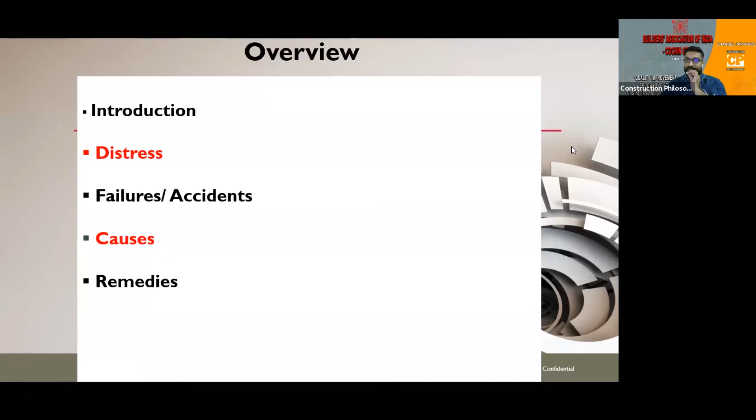Anyway, so the overview of my talk today is: introduction to the topic, and we briefly talk about what is distress, and failures and accidents that happen because of excessive distress, the causes of these distresses in buildings, and remedies we will talk about. So this is the brief overview of my talk.

So normally any building which is in distress tries to de-stress itself, meaning it will collapse. That is the thing. And we all know why there is distress in a building.

Any building that is designed as per the intent, as per the design basis, will not have distress. We consider the loads as per the standards. We consider the planning as per the intent of the user and end user requirements. And we design the structure as per well laid out structural principles, by analyzing for the stresses and loads and designing for the stresses. That is how buildings remain healthy, with the serviceability criteria being met and the limit state of collapse being met.

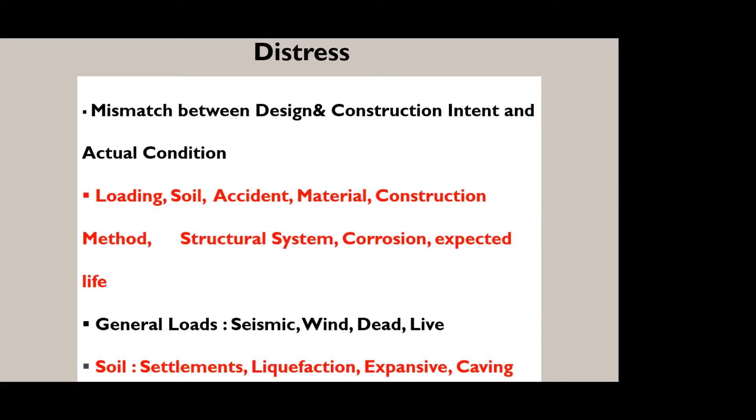And next is the soil. In the soil, the settlements are calculated based on theoretical things and testing that we do. But in real conditions, it is very difficult to predict accurate settlements because of soil structure interaction differences, and the soil itself is such a complex medium that prediction of settlements is not alone possible by the soil sample collected at the location or the plate load test. It's a wide spectrum, and there are still a lot of gray areas in soil. Anil is a better person to comment on this, but definitely it is the biggest challenge for engineers and buildings.

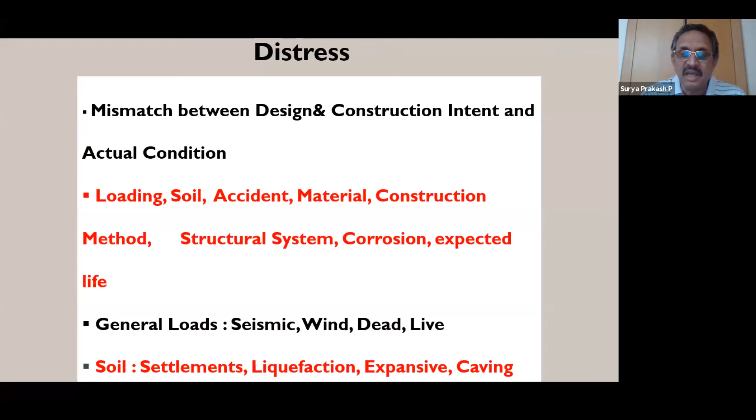Liquefaction is another biggest phenomenon during earthquakes, particularly for silty sandy soils. When we design structures, we have to consider this phenomenon and provide for ground improvement. Expansive clays and caving in of soils because of the formation of strata and different strata - these are all various factors that can cause distress in buildings.

Accidents include fire, blast, impact, and flood - these are the various accidents that can happen. We have to keep in mind, particularly for accidents, we may not be able to design for serviceability criteria, but at least we have to design for robustness, that means to prevent collapse of the structure.

Next is the material - poor quality of material due to improper quality standards, wrong specification, and the shelf life, that is usage of the material. I have come across many projects where the concrete used in structural elements has already set, initial setting is done. So when we do the testing, we realize the cube strength will be all right, but the actual concrete used in structural elements will not be according to design specifications. That is where shelf life comes into picture, particularly for cement, concrete, and various chemicals we might be using in construction.

Next is the structural system - it is an engineering error actually in analysis, modeling, support modeling, and element modeling. I also come across a lot of people misinterpreting structural systems, and the load transfer mechanism also depends largely on the structural system. And the corrosion and life of structure, which we'll deal with via examples.

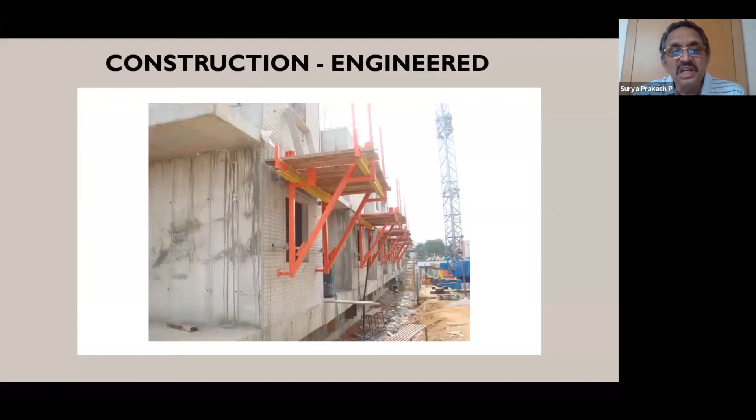All this will cause a lot of distress in buildings actually. And unplanned openings in the wall or structure, conduits, and all this will cause stresses which are not considered in the design.

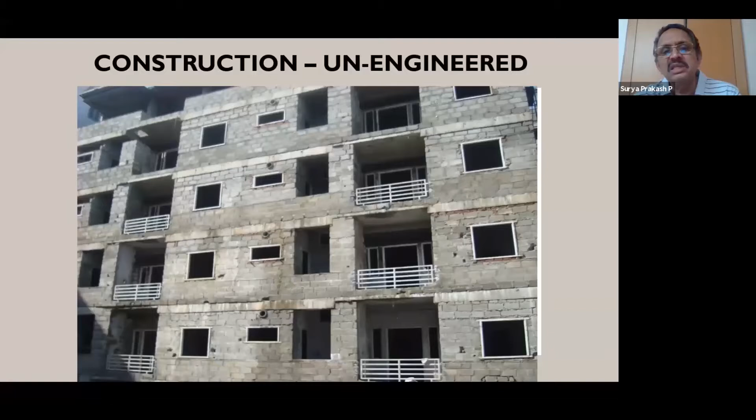In a typical construction site, we see differences between the detailing as per drawing and actual construction - whether it's the reinforcement, the cover, the alignment of the column, or alignment of the beams. All these factors contribute to distress if they are not properly done following the relevant codal provisions, standards, or practice.

We feel concrete is a homogeneous and hard material, but you can see what happens if it is not compacted or vibrated properly. Whatever grade - M20, M25, M30 - we design the mix and make the concrete as per design, but if it's not executed properly, the cube strength will show very good results while the actual site condition is like this. If we're not given the opportunity to inspect before they render the top, we don't even know the concrete isn't compacted properly, and it will be subjected to stress and distress that is undesigned.

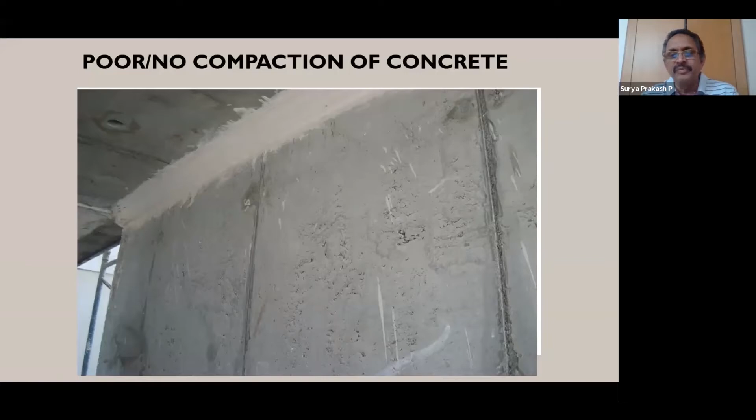So we have made it a point, particularly for concrete, to have core tests done at random, to ensure that the concrete that is designed and the concrete that is executed are of the same grade. This is one of the biggest points.

Next is construction joints. This is a typical photograph I got from some sites. Can you say you see any construction joint engineered here? This is actually the biggest problem - if these construction joints are not treated or made properly, it will cause a lot of problems in the performance and serviceability of the structure.

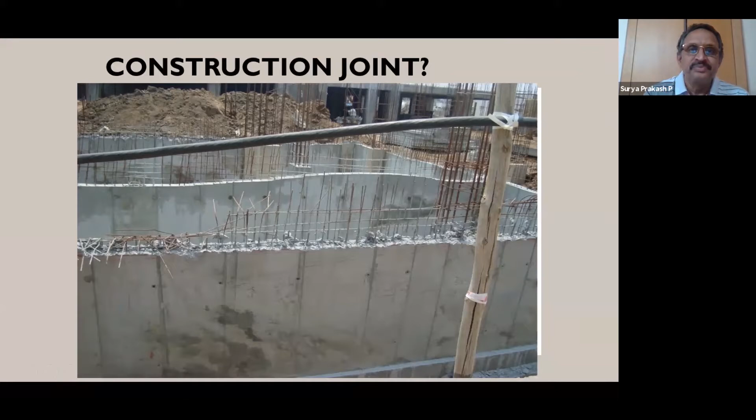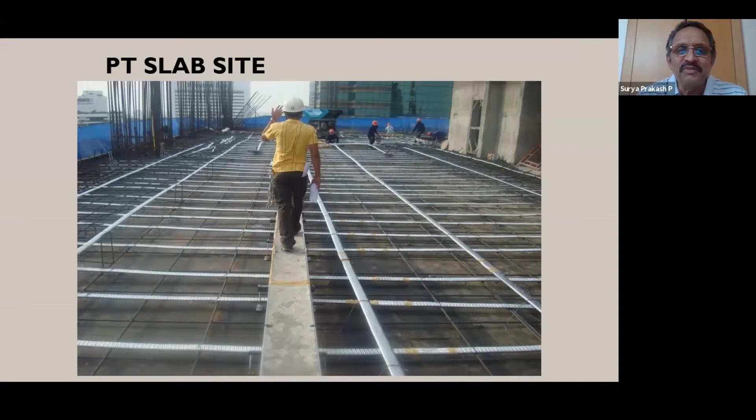The next biggest thing happening in our country now is the PT slab. I've probably been using these post-tensioned slabs for the last 20 years in buildings. But with post-tensioning, with more technology we are inviting more challenges and causing more distress in the building. So I'll be sharing some examples of challenges we have in PT, post-tensioned slabs.

Next is waterproofing. This is the biggest issue in buildings, particularly residential or even office buildings, where we have toilets. If they are not treated properly for water barriers, and the detailing of this water barrier in conjunction with sewer lines and plumbing lines, it becomes a huge challenge. This can cause deterioration of the designed concrete quality and performance of the structure over time, leading to higher distress. It starts with dampness, then slowly corrosion, then distress in the structure. This waterproofing and water barrier is a very important element which I'll be sharing.

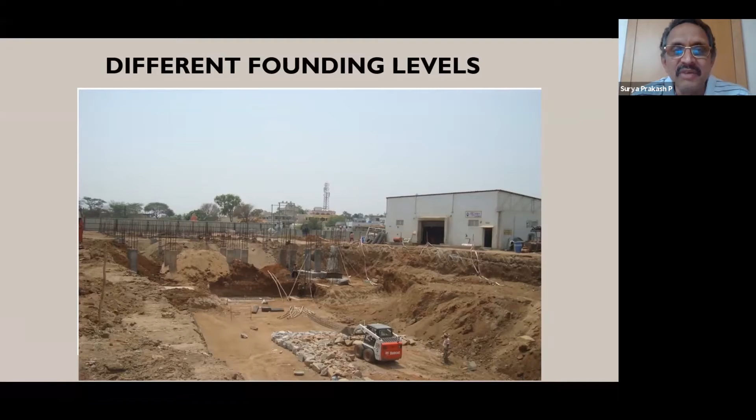Next, in soils, you can see the difference in founding levels, which mostly happens for lift pits that have to be deeper than the basement level. There are different founding levels due to soil conditions at the site, but we have to consider the minimum clear distance between footings and the difference in level, which has to be 3D to 5D depending on the type of soil. This is a very important aspect during construction - construction teams take a decision to change the level considering the soil, but it has to be brought to the notice of the concerned design engineer and probably a geotechnical expert to decide how it has to be treated when there are different founding levels.

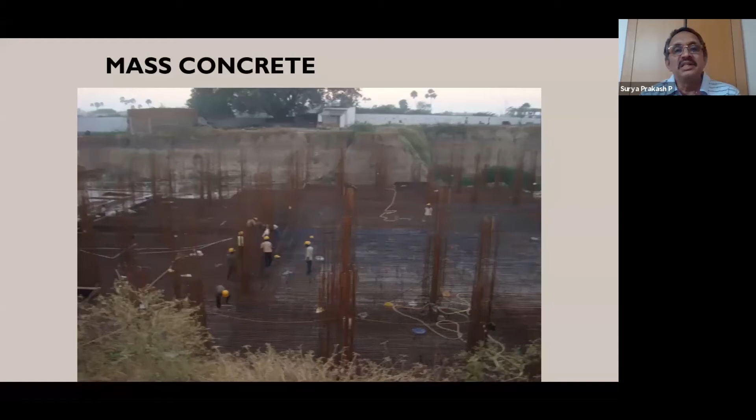Next is mass concrete. This also causes a lot of issues, particularly in rafts, when you do mass concreting without designing for the heat of hydration. The initial concrete itself can have internal cracks, which can also lead to additional stresses and distress in the foundation itself.

Excavation, deep excavation, which is very common nowadays, without considering the adjoining structures, can also lead to catastrophe or distress in the buildings. So instead of going for retrofit or rehabilitation or repair kind of stuff, it is better to have proper methodology, proper approach to handling these deep excavations by shoring and strutting, by active anchors or passive anchors kind of systems, or touch piles or shoring piles or sheet piles. So this is very important.

We have to plan before itself, considering the excavations and adjoining structures, and we have to draft the design basis considering the type of soil and the depth of excavation and adjoining structures. So this is the important aspect. So I'm just covering various aspects of this distress.

Collapse during construction, which is again quite common, which happens in most of the buildings because of lack of construction engineering. So one has to plan the shuttering and centering and support system for any concreting works, considering the loads during construction and the stages of construction. We have come across many through news, many during construction, and loss of life is a very pathetic thing that happens.

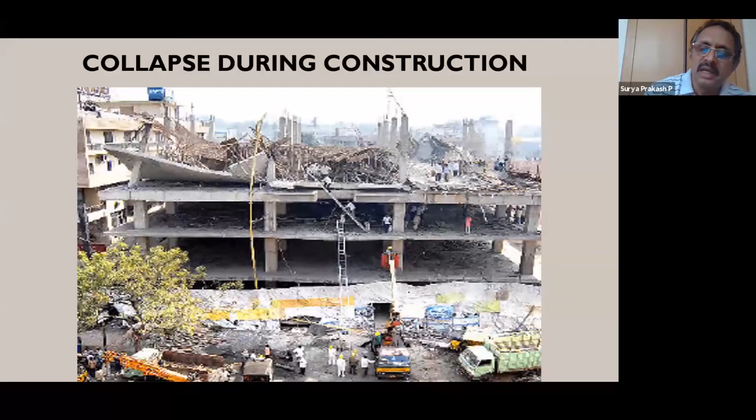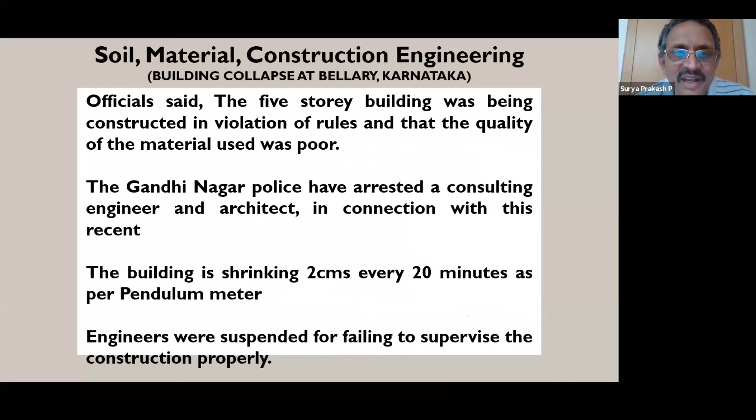Now let us look at some of the case studies that I have come across, just to stress on the importance of proper engineering, proper quality control, and proper management of the built environment. So no soil test, no material test, no construction engineering. I'll not read all this stuff, but with photographs - this is an accident that happened in Hyderabad, again during construction itself, but it was a progressive collapse.

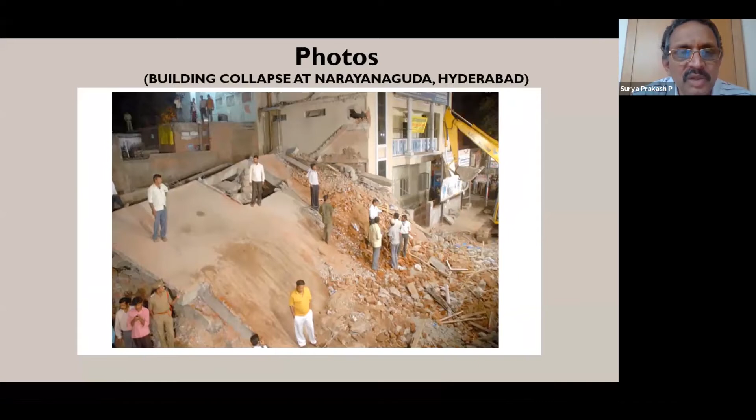One slab collapsed and subsequently 2-3 slabs, and people died - 2-3 people died during construction of such a small building itself. Many people got trapped and then had to be removed. This is another accident in Karnataka, Bellary. Here also you can see during construction itself, due to bad material, bad engineering, or no engineering, the building has collapsed. A thorough investigation was done, and the people responsible were taken to task.

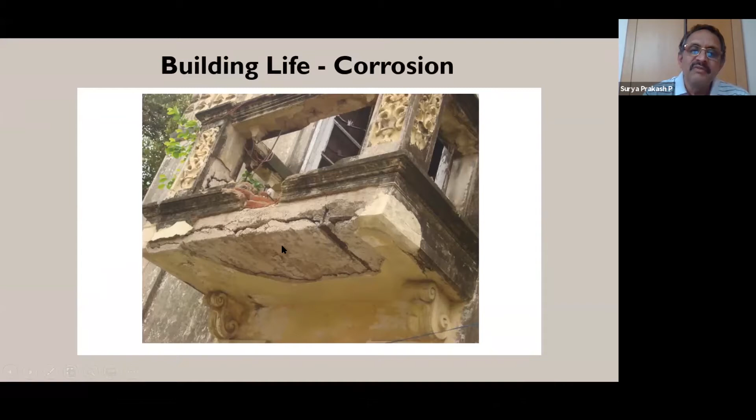Next is the dilapidated heritage old buildings. This is probably a more than 100 year old building in Hyderabad. This is the condition of the building, and if this has to be saved, it is a very real challenge for the engineers restoring this kind of buildings, where this was lime concrete, and lime concrete has to be restored.

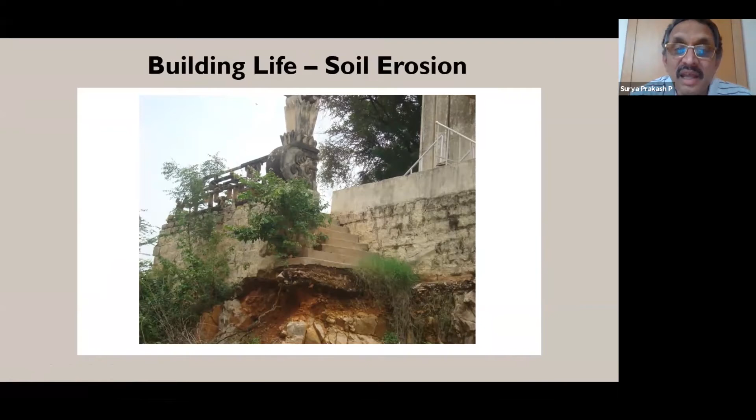You can see a lot of vegetation and erosion in the soil underneath the structure itself, and the ground levels varying. So all this has to be considered while assessing the life of the structure, or certifying for further life of the structure, residual life of the structure. Here also you can see below the foundation, the soil has got extensive roots and trees grown, and it will also cause distress in the building.

This is the weathering aspect of even the jack arch roofs. It has served a very good life already, more than 100 years, but still we have to consider - if we have to extend the life of this kind of structure, thorough investigation and proper method of restoration have to be adopted.

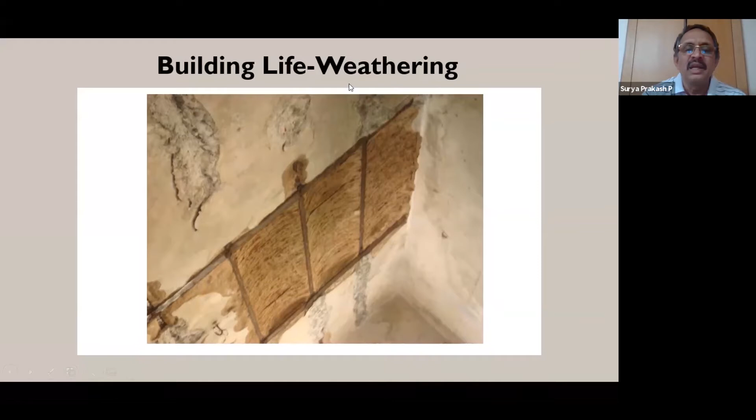Next is the earthquake. As introduced, I had the opportunity to visit Gujarat, Ahmedabad post-earthquake. Very unfortunate, but a big eye-opener. In fact, this is when I thought there was a strong need for engineering reforms. I was part of a committee constituted by the government of Gujarat then, and I had the opportunity to work with Professor A.S. Arya.

In our report, one thing is we have prepared the guidelines for damage assessment of the structures post-earthquake, and which kind of structure can be restored and which kind of structure has to be dismantled. We have prepared the guidelines, which has become part of the code, I was told later. But we have also given the recommendation to the government to value the presence of good engineering practices.

This is very, very important, because most of the structures that were in Gujarat were not designed for earthquake itself - that is the saddest part of it. So they will be subjected to distress because of the earthquake for which they are not designed. And then periodic training of all categories of engineers - what are the categories of engineers?

We suggested that a geotechnical engineer has to be on board of every project, along with a structural engineer and a civil supervising engineer. These three categories are minimum for larger projects, larger spans, or tall buildings; there should also be a peer reviewing engineer. So there are 4 categories that we have suggested, along with minimum fee structures for professional engineers.

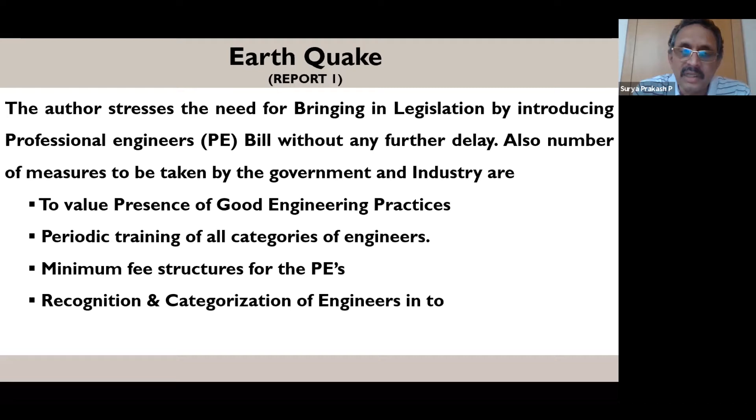This is one of the biggest challenges our industry is facing, because if engineers are not paid well, there's a saying: if you pay peanuts, you get monkeys. The same thing is happening in civil engineering and structural engineering. So we have to have recognition and categorization of engineers.

This I have drafted in 2001. I'm just sharing the same report. It is still a dream to be realized for me, for all of us engineers, so we all have to work for it.

So geotechnical engineers, structural engineers, construction or supervising engineers, and proof consultants or peer review consultants - these are all 4 categories which have to be part of the design team or project team, who should be professional engineers. They should have accountability, responsibility, and should also be recognized by the government in these categories. This is what we are all fighting for all over India now.

So the first cause of damage is lack of good engineering practices, resulting in poor quality of materials, bad workmanship, and lack of good construction practices.

The second cause is ill-formed structural systems, such as irregular grids, stub columns or floating columns, large cantilevers, and unsymmetrical and non-uniform patterns. Now you can see the latest code 16700 and IS 1893 recommendations about symmetry have evolved from these observations during the post-Gujarat earthquake.

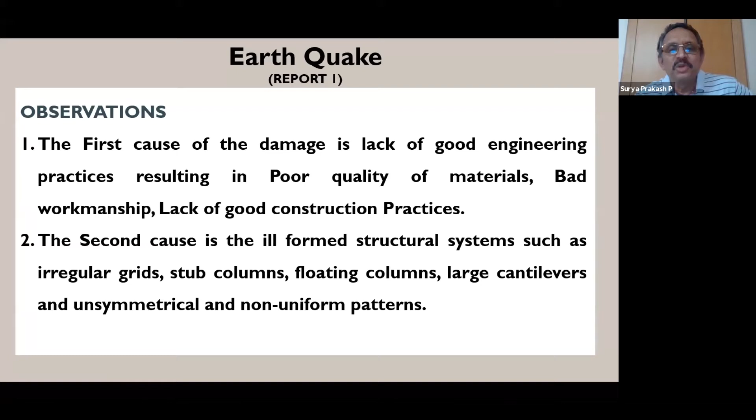Next is the lack of proper design approach. Many buildings are not even designed for earthquake, as I said. The ductility provisions to be followed in earthquake-prone areas are not followed, and even the standards are not complied with in the detailing or provision of reinforcement. So everything is missing.

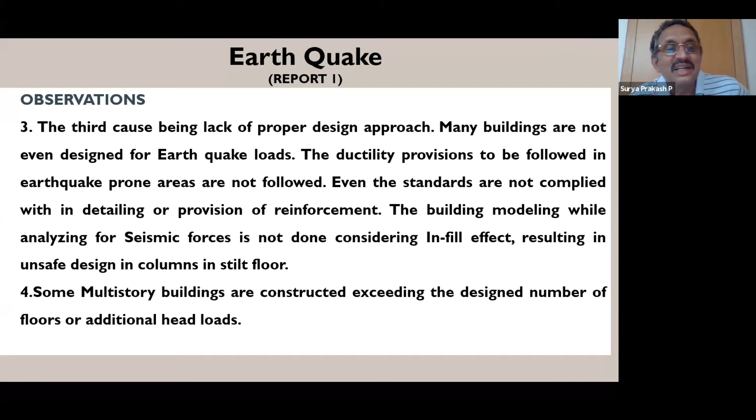Multi-story buildings are constructed exceeding the design number of floors, or with additional dead loads like water tanks. Buildings with good framing patterns, with columns at regular intervals - every engineered building has performed well. 90% of the engineered buildings have survived the earthquake without much damage. So the basic requirement is engineering.

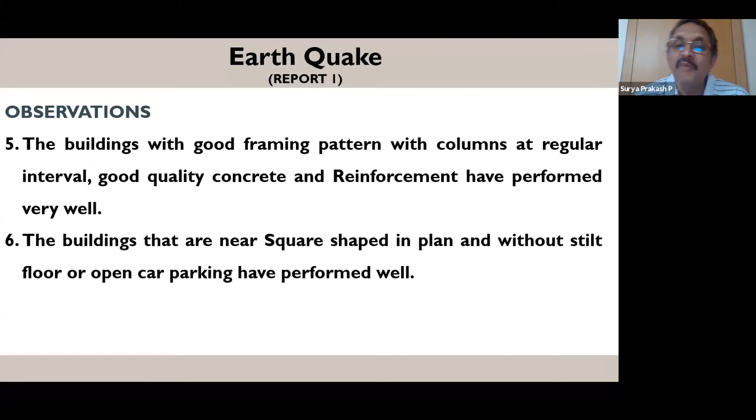The buildings that are near-square shaped in plan, without stilt floor or open parking, have performed very well. These are all the observations.

So, enforce the professional engineers bill. This was our recommendation in 2001: 4 categories of engineers, occupancy certificates, and periodic certification. Please remember, all buildings have to be qualified for seismic loads every 5 years. This is another recommendation we made, and it is part of the National Building Code also.

So we all have to insist that when we certify structural stability for a building, we qualify it saying this certificate is valid for 5 years and has to be renewed every 5 years. This is because codes are changing, and with every revision in the code, the building we have certified has to be retrofitted. So we all have to work for it.

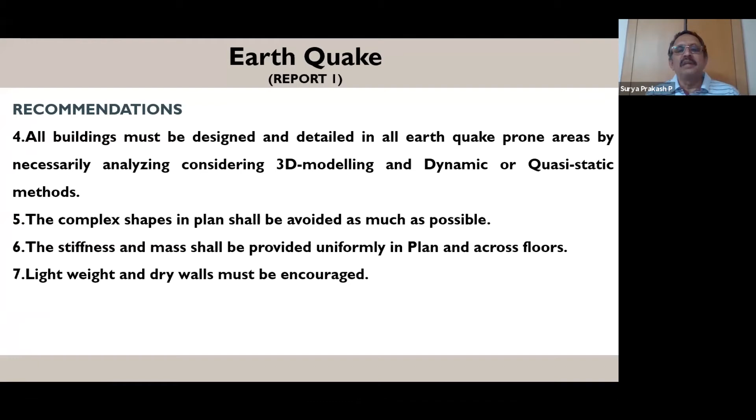Next, all buildings must be designed and detailed per 13920 in earthquake-prone areas, necessarily analyzing and considering 3D modeling and dynamic or quasi-static methods. Complex shapes in plan shall be avoided as much as possible, considering stiffness and mass. So these are all the recommendations.

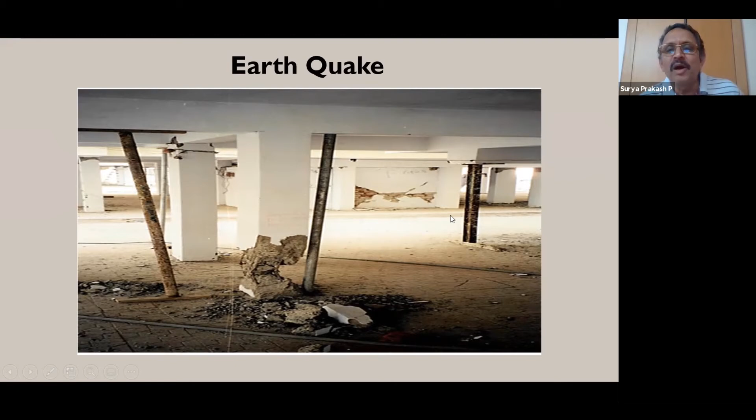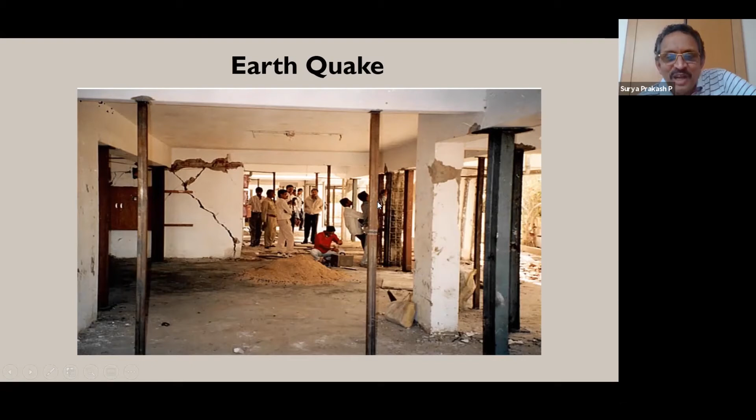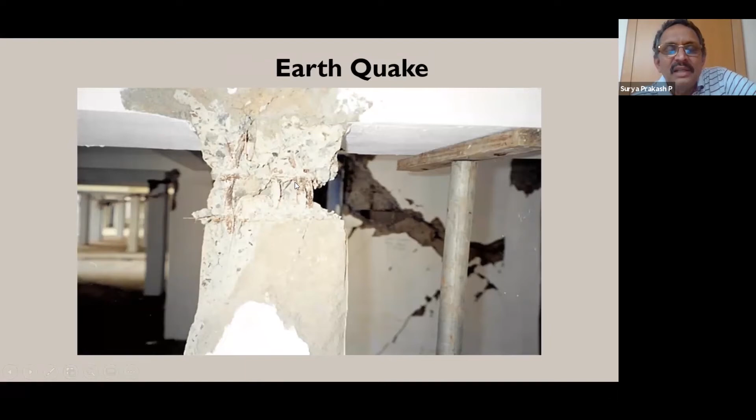So these are the distressed buildings I call. You can see here also most of the damages are near the beams, floor beams, and above the floor. So the maximum shear occurs here, that's why we have ductile detailing at the junction of the beam and columns. Here also is another case of a column where it has cracked. So these are all the distressed elements.

Next is wind. For earthquake we have seen some examples, and for wind, these are some of the towers which I have inspected post-collapse. Maybe I would have done 50, 60 collapse forensic audits for the failures.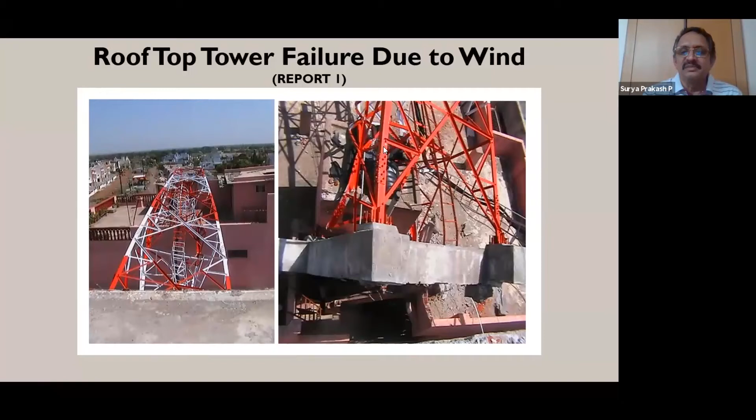Here you can see the foundation concrete has flown with the tower. This kind of distress is because of lack of proper anchorage. So when we talk about wind, the shear and the anchorage are very important, and the tension for which we have to design. These are the foundation pedestals without proper anchorage to the base structure. And this is another mast which has collapsed.

So many examples. Here you can see the net area calculation, which is very important in case of tension members. We have the formula for net area in which we have to consider the number of bolts. But here you can see, during construction, they have put more bolt holes in the same cross section, because of which the whole structure has failed. So it's very important detailing in steel structures, particularly for wind conditions.

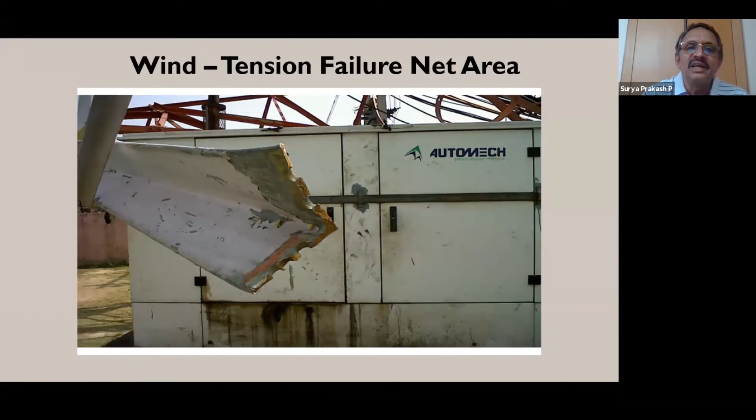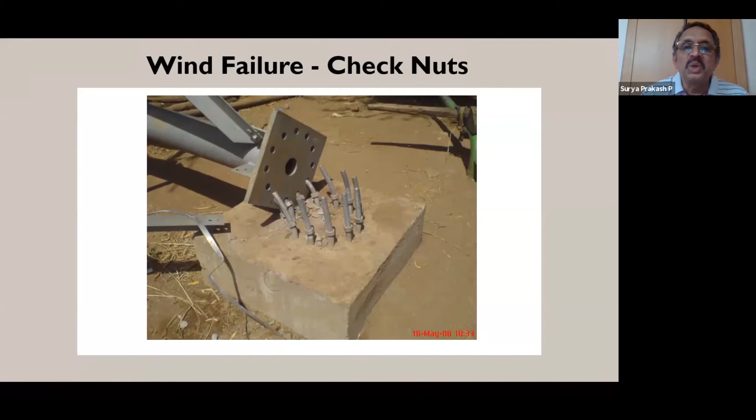And base plate, the check nut - in fact we insist on nut and check nut. Check nut is the second one, which should prevent loosening, and these are the leveling nuts below the plate. So it's very important because if we see these distressed structures, we'll understand the importance of this detailing and the various provisions given in the codes.

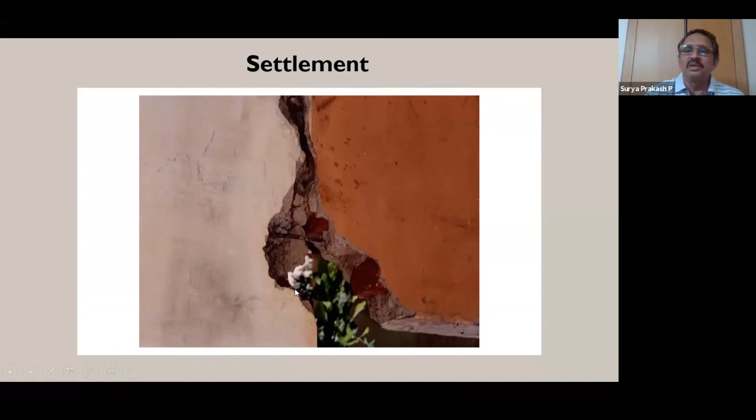Next is settlement. This is settlement due to expansive clays, in one of the projects that we observed, even 3 inches of separation in the masonry walls. You can see here, this is due to soil settlement, distress in the structure. We marked these things to observe the further progress of the cracks during settlement, and we had to give an external solution for this kind of project. You can see the building, it's just G+1, but still there are so many cracks and distress here also.

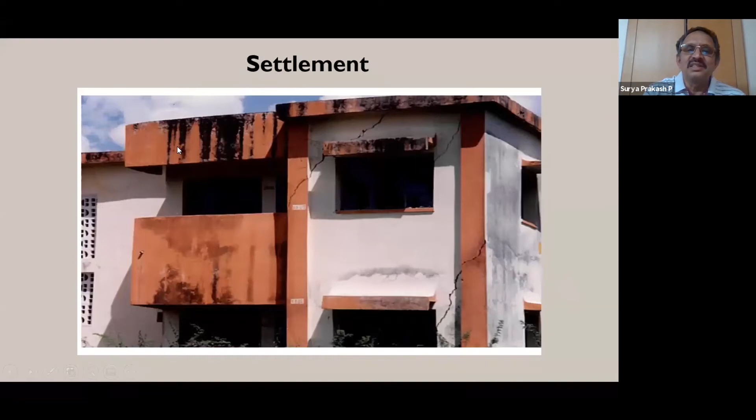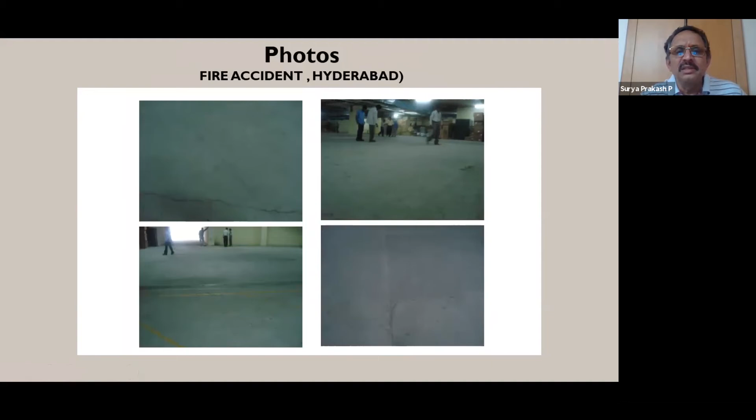Even the drop panels, you can see the reinforcement is exposed in the flat slab drop panels. We observed the levels of the slab and cracks in the slab, recorded them, and found that the structure was safe and intact, so we immediately repropped and restored this structure. It's been more than 10 years, and it's performing well even now after rehabilitation.

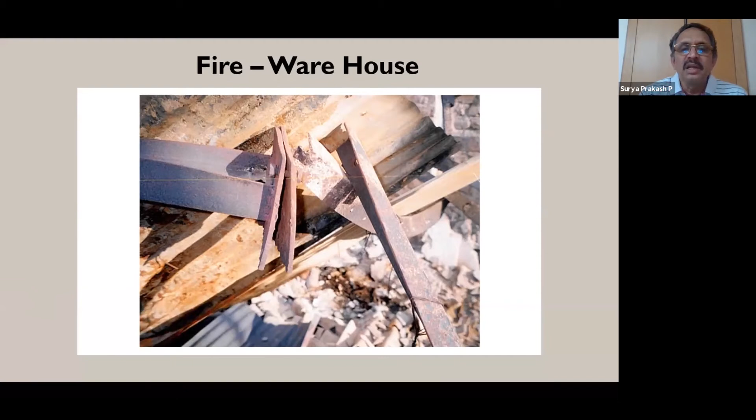Steel structures in fire - again, this is a big thing we all have to consider. Here the structure has collapsed because steel structures, if we don't treat them for fire rating, whether it's insulation or intumescent paint that creates insulation when subjected to fire, it's very important for steel structures. Otherwise steel structures are very disastrous against fire, and corrosion of course. So as engineers, we have to take precaution to advise and draft the fire rating in the design basis. A 2-hour fire rating minimum is very important for any structure, because that's the time required for evacuation during fire accidents. These are some photographs showing how the steel members are twisted.

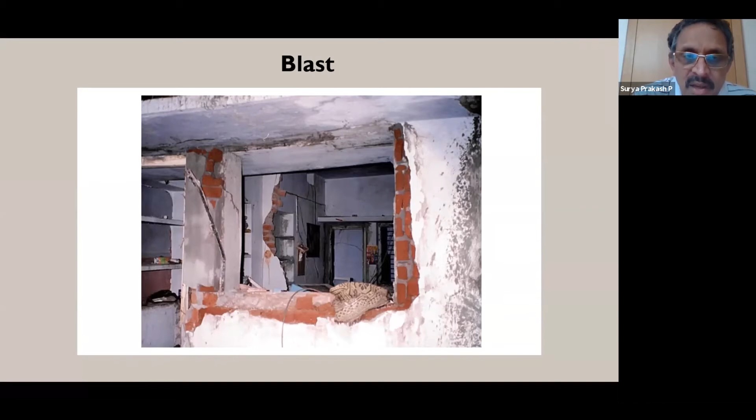Next is blast. Even a small house with a gas cylinder blast can cause this kind of distress and loss of life. So we have to have basic detailing provisions to prevent structural collapse due to blast. People may not die because of the blast, but people will die because of the collapse subsequent to the blast. So we have to give robustness to the structure against blast, particularly in tall buildings. This was one of the blast accidents that happened.

Next is the structural system case study. We come across many times flat slabs - the difference between flat plate and flat slab - and drop panels or column heads being missed, and the shear failure it may cause, or the distress or excessive deflection that it can cause in flat plates.

So we have to retrofit such things, or we have to properly design the elements with the proper structural system.

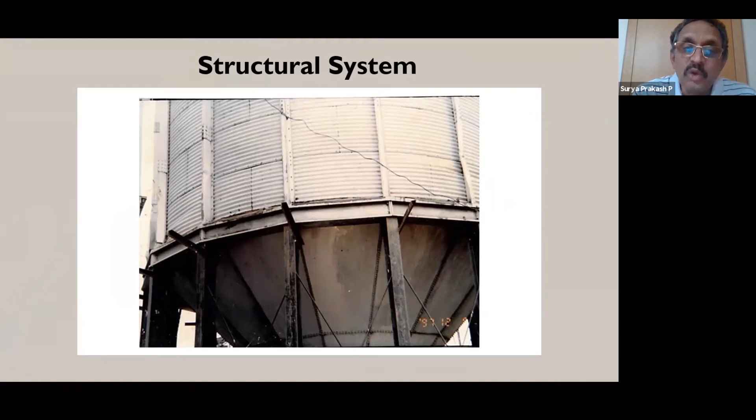This is another interesting example I have come across, the silo. In any design of the silo, we all know that the most important thing for considering the load or stress in the silo shell is the friction coefficient. Here the designer, very excellently, considered the GI sheet, but he put the GI sheet horizontally, corrugation. Because of which the friction coefficient multiplied manifold, and then the whole silo failed because of the excessive loading. This is because of the mismatch between the structural system design and the structural system actually executed.

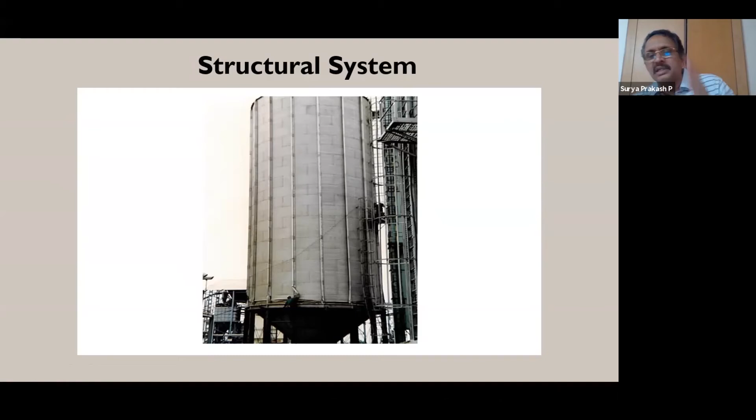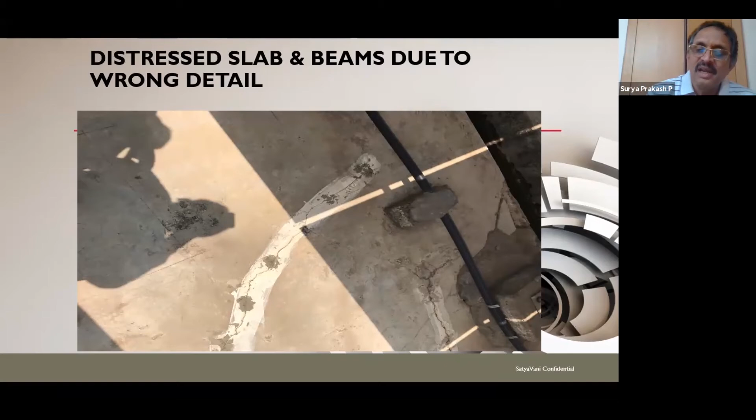So this kind of example gives us the importance of meticulously following, starting from design intent, design basis, design calculations, and construction engineering and construction practices. Next is the structural system model, behavior, and detailing. I recently came across one building where the structural engineer assumed some structural system. The cantilever, which was to be considered, was not considered. He considered the cantilever as a secondary beam and designed accordingly, meaning he failed to take the results and plot the bending moment and shear force diagram, which is very important for designers. This is the result of such an error. You can see the grid of beams and the failures. We did the study and gave a report saying there is a big mismatch between the actual existing structural system and the system considered in the detailing and design.

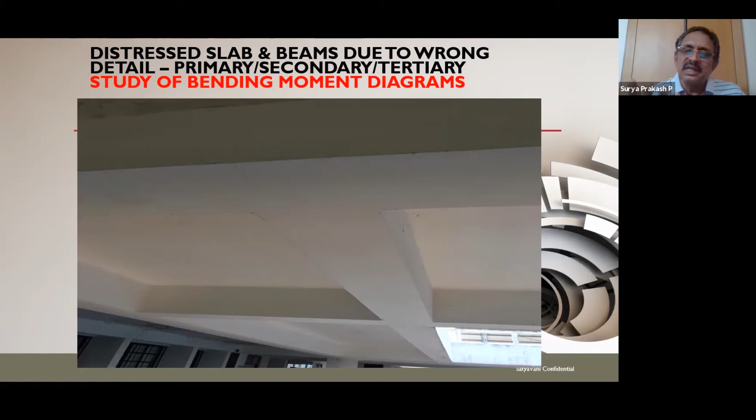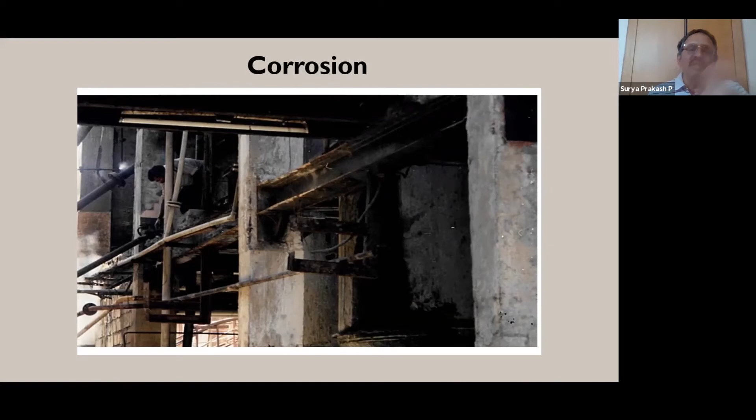Now corrosion, this is the kind of fumes that are there in the factory, for which the design intent did not specify the proper treatment for the structural steel members.

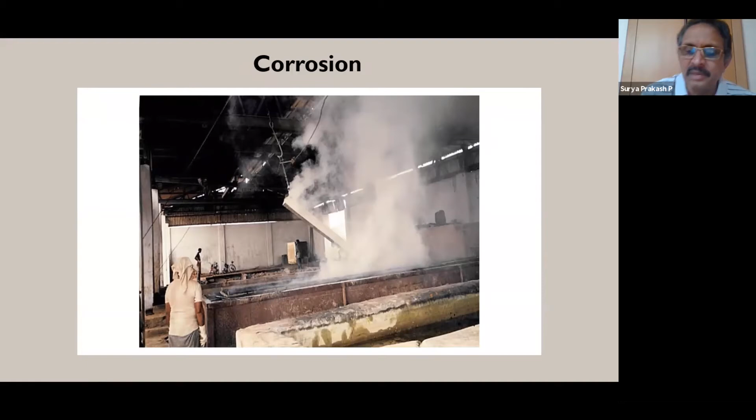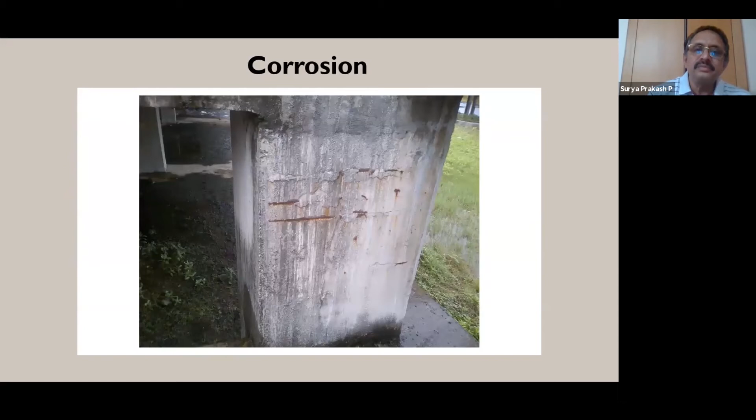And this is the concrete structure. We all talk about exposure condition in IS 456, mild, normal, severe, extreme kind of exposure conditions for concrete. Here is a good example, a classic example of inadequate cover for the reinforcement, because of which you can now see the entire reinforcement pattern in the structure, all columns, beams, and even slab. This is the corrosion example of concrete structures. You can imagine the level of distress that this corrosion can cause to the structure. This is the column, you can see the ties and main bars in the column with the corrosion.

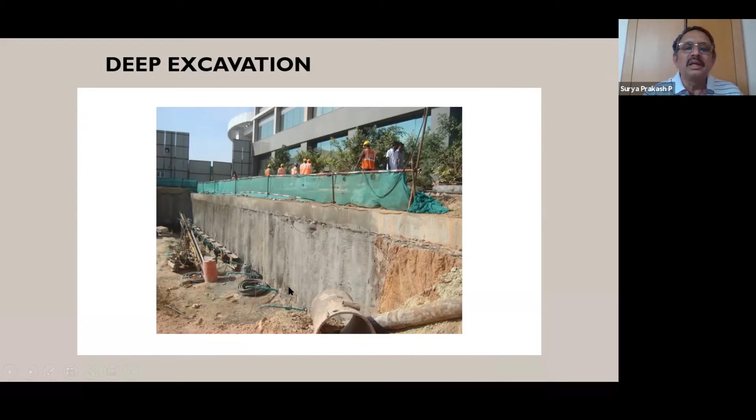Next is deep excavation, very, very important. Nowadays we are doing deep basements, 20 meters, 25 meters deep, in many projects over the last 15-20 years. We have to study the soil profile, soil strata, water table conditions, and hydrostatic pressure. All these things we have to consider and design, and if we don't design properly, this can cause a lot of distress. Here you can see the shoring piles with a capping beam, and before even excavation proceeded, we keep doing the gunneting or shotcreting with the mesh of reinforcement and the piles.

And here, regarding the design brief, I would like to say that I insist a lot on micro detailing, and we have to insist on a certain design brief, meaning the method of deep excavation shoring protection. There are so many methods of shoring protection, and as engineers we have to specify the right one, which is reliable and safe. And if we specify it right, and some contractors take deviation, and if anything happens, at least as a structural engineer, you are protected.

Next is the plinth beam, grade beam, and brickwork above and below the plinth beam. All these things we have to detail very carefully, considering water table levels and flooding conditions, and also reptile or rat protection. All this is very important in the detailing.

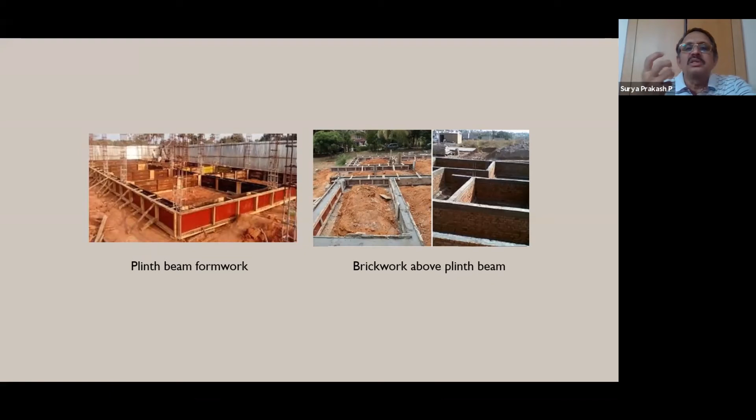So these also, bandicoots, which can excavate through concrete or brickwork even, and cause a lot of collapses in the structure or soil settlements. Curing, next, during construction is very important.

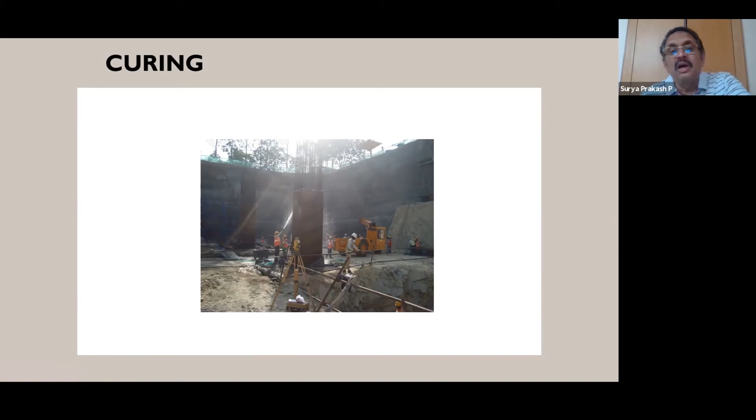Curing precautions with the proper curing methodology, whether it is curing compound or water curing, and steam curing in case of cold weathers, or in precast conditions, accelerated curing. All this we have to specify properly and follow the methodology as per the design.

Next is even the plaster and masonry works. We have seen many failures because of lack of design. Many people think that masonry is mason's job. No, actually masonry is also engineer's job. We have to do proper design for masonry. There are codes for masonry, codes for design of structural masonry.

Every structure, every element that weighs more than 500 kgs, let us say, is a structure actually. We have to design for the wind load, self-weight, and any eventual loadings. And we have to detail proper construction method and execution method. Method statements we have to prepare for masonry and plaster even.

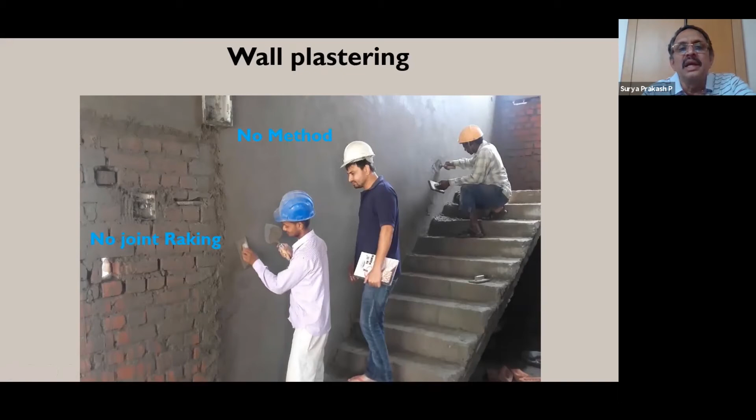And next is the waterproofing. Many people, waterproofing itself is not a correct terminology in my opinion, but still the structure that we are designing, we are giving the cover, assuming normal exposure condition or moderate exposure condition. But if we don't provide these water barriers for the structure, there is a mismatch between the design intent and design method, design basis actually.

So we have to have a waterproofing barrier below the foundation and around every water, dampness, exposure of dampness, like underground sumps, swimming pools, and septic tanks or these collection tanks. So roof is another thing, weatherproofing of the roof.

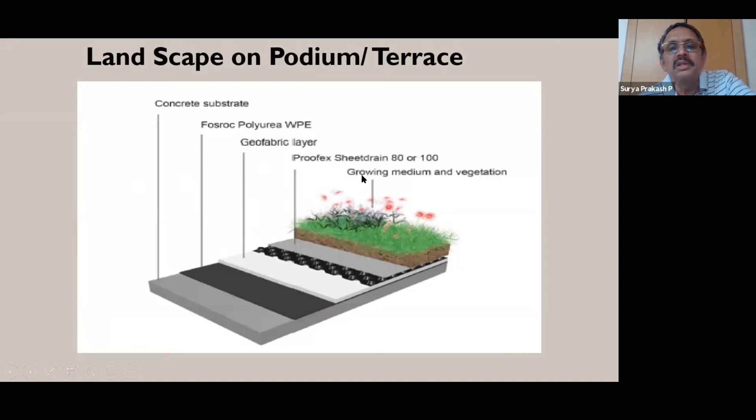So all, and driveways. So we should have the total and lawns landscaping. So you can see we have to detail the waterproofing barrier, which otherwise can cause distress in the buildings. And this is the detailing for landscape. We have to provide the drainage, geofabric layers, sheet drains and membranes and all that. So we have to be very cautious.

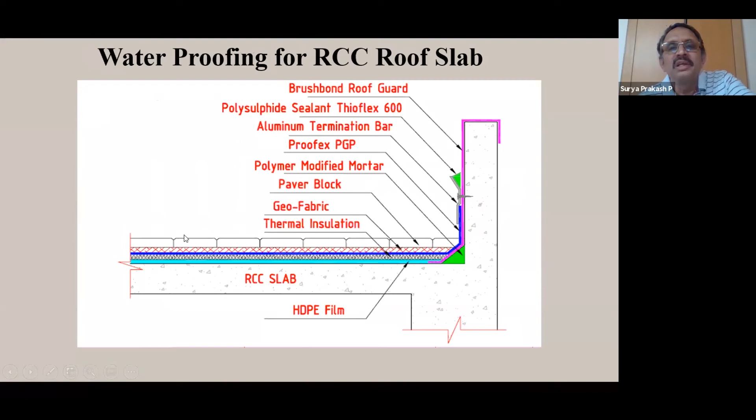And toilets, detailing of the WC's P-trap or S-trap and the Nahani traps and all that, the detailing has to be proper. And this is the sunken slabs or swimming pool areas where again we have to have the 2 layers of the water barrier.

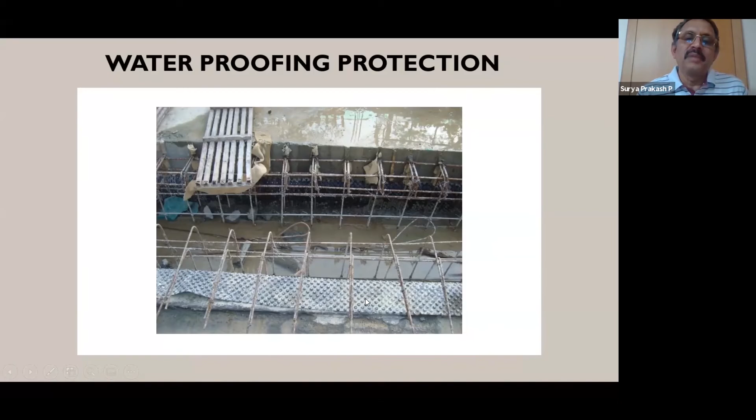And this is the protection against for the waterproofing layer membrane. Protection for the waterproofing membrane is also very important. Here you can see the bubble sheet that we provided for the waterproofing membrane.

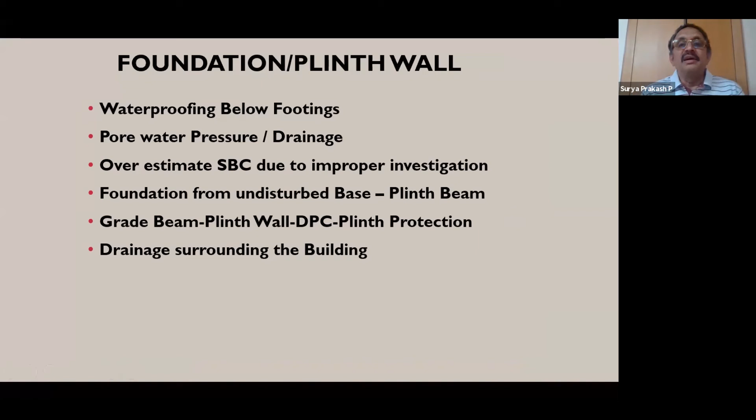So waterproofing below footings, pore water pressure drainage, overestimated SBC due to improper investigation, foundation from undisturbed base, and plinth beam, grade beam, plinth wall, DPC, plinth protection, drainage surrounding the building.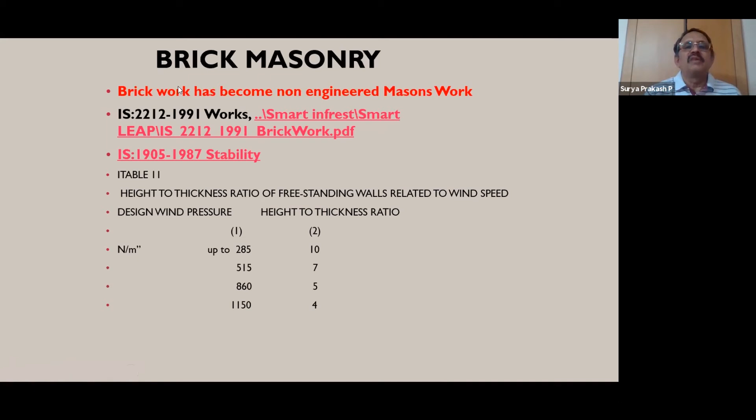So this brickwork has become non-engineered mason work. So we have to follow these codes, IS 2212, 1991 and IS 1905 for stability of the masonry. So let's not forget, we have to design the masonry.

Length to thickness ratio, height to thickness ratio for the masonry, they're all specified in the code and they're all based on, nowadays we are using so many types of bricks and blocks, aerated concrete, cellular lightweight concrete, clay bricks, cement blocks and lightweight bricks and all that. So for each of them, these factors will change. So we have to be very cautious and design the masonry as per the codal provisions.

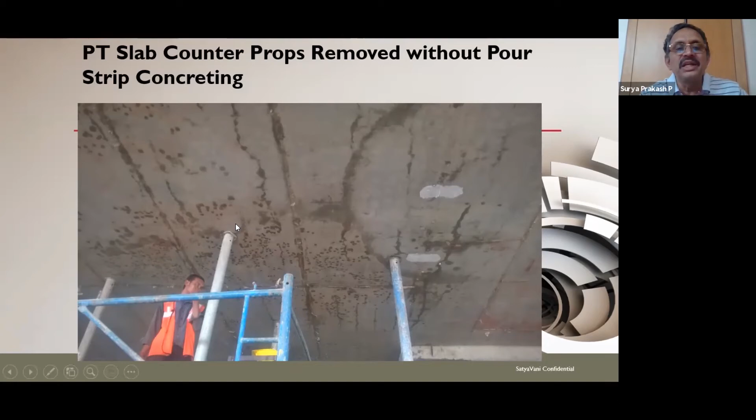And PT slab counter propping without pour strip concreting. So this is the very important thing, counter props being removed during construction that has caused a big cracking here. You can see this is the pour strip and this is the cracking happened near the supports. So please, we have to jack up that slab and restore the structure.

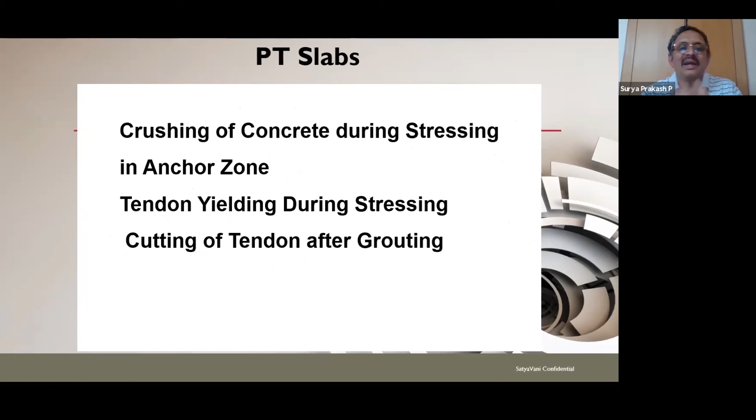So these are all the things we have to take care of. For flat slabs, direct design method and equivalent frame method, you have limitations that many times get missed. So we have to be very careful about punching shear provisions and deflection checks in large spans.

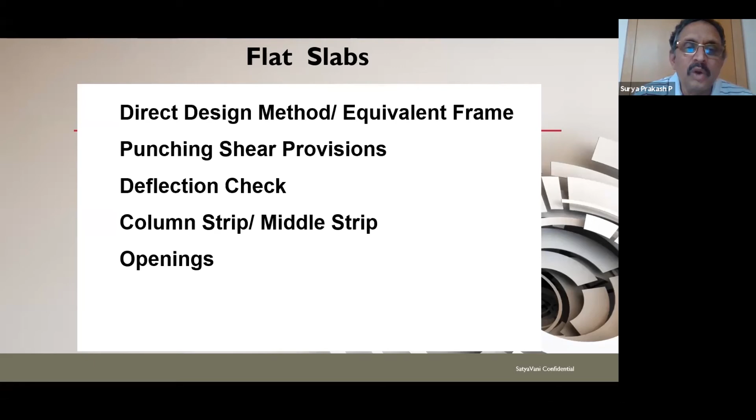Long-term deflection particularly, considering shrinkage and creep and long cracked section and inelastic section - these are all things to check particularly when we do limit state of serviceability checks, along with column strip, middle strip, and openings in the flat slab.

Lap provisions, honeycombs in the concrete lumping due to initial setting happening before usage of the concrete, and ties in the columns and starters in the columns. The starters are the biggest cause of distress, and beam junctions.

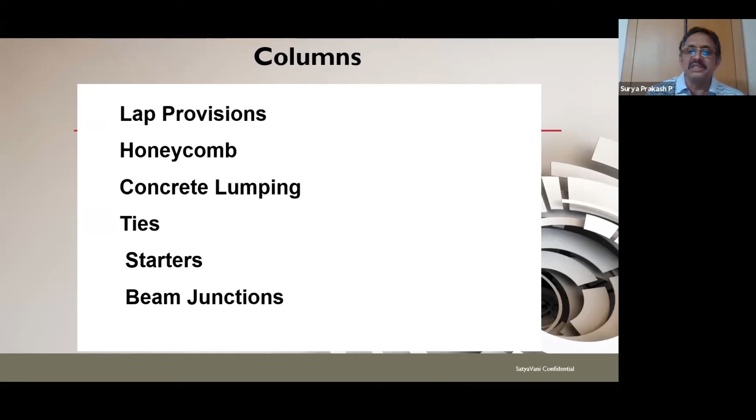And this is in one of the basements, we had hydrostatic pressure, and the whole basement, 2 floors, got lifted in the podium level actually, just because the client had plugged the pressure relief wells.

Then we had to provide separate bores and give the pressure relief like this. This is after retrofitting is done. So the water pressure is relieved and the structure performed well.

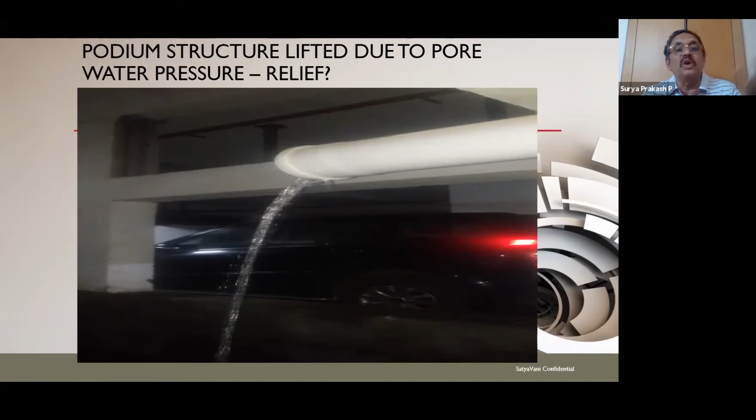Shrinkage due to water cement ratio, long-term deflection checks not being done, wrong detailing, SP34 not followed, support condition modeling, delayed concrete particularly when we use ready-mix concrete, pour sequence of concrete, and bad joints.

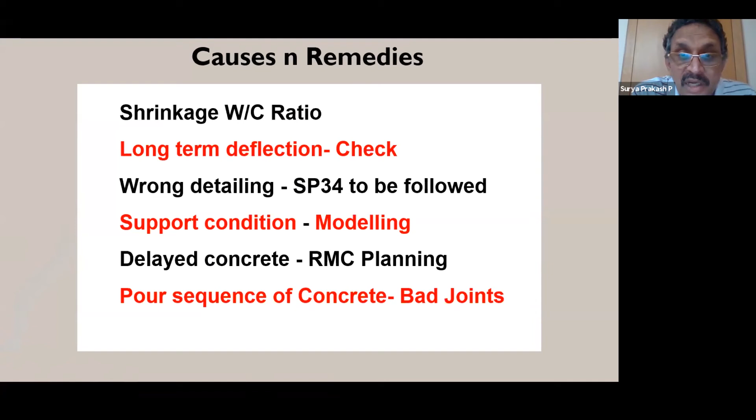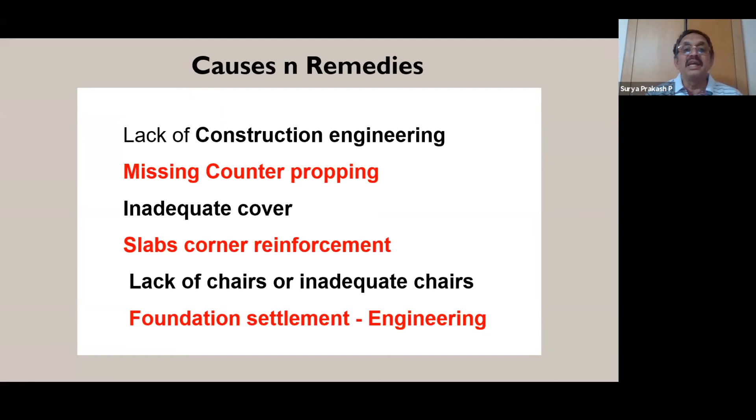These are all the causes of things, and we have to eliminate them - lack of construction engineering, missing counter propping, inadequate cover, slabs, corner reinforcement, lack of chairs or inadequate chairs, foundation settlement, and foundation engineering.

Expansive soils, backfill compaction, layered soil properties to be considered, and inadequate or no geotechnical investigation, expansion joint treatment, reinforcement congestion in detailing, construction sequence timing, and satisfying design assumptions, buttress retaining wall versus backfill condition of the stem wall.

Deep excavation shoring design brief - I'm just wrapping up. And construction loads, material dumping during construction, and curing period and periodicity of cubes.

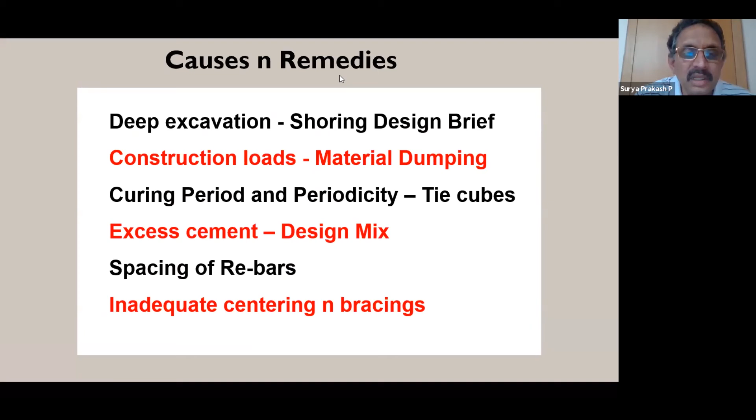Excess cement in the design mix, spacing of the rebars, inadequate centering and bracing, construction joint treatment, waterproofing, weatherproofing, embedded pipes, clusters, chasing of structures.

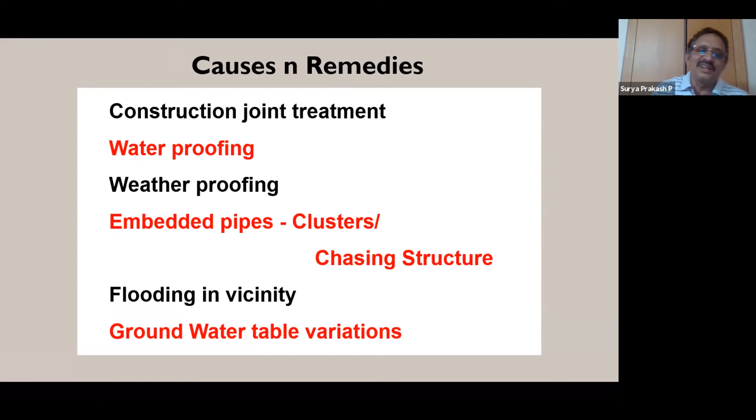Clear distance between the footings and the difference in the levels of the footing. Plumbing and drainage, terrace slab sloping, dimension tolerance of the slabs, beams and columns, topo survey and setting data on adjoining buildings.

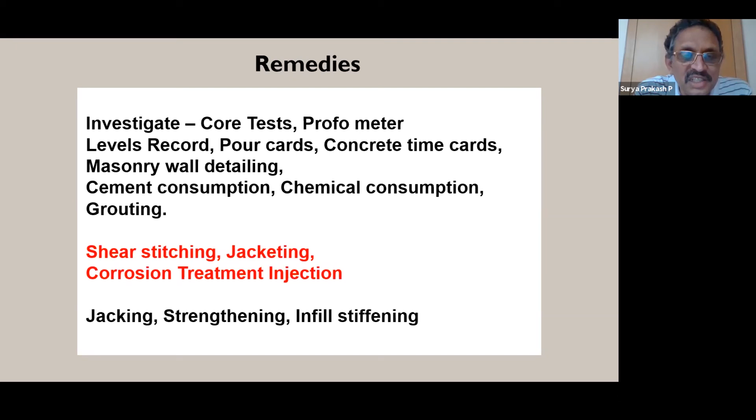So remedies are: investigate, core test, profometer, levels record, pour card, concrete time cards, masonry wall detailing, cement consumption, chemical consumption, grouting, shear stitching, jacketing, corrosion treatment, injection, jacking, strengthening, infill stiffening.

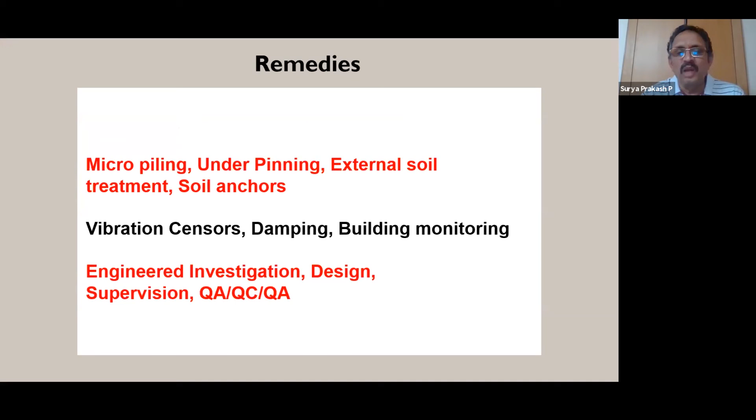And finally, prevention is better than cure. So to avoid distress in buildings, we have to train engineers, motivate engineers to be engineers, and enlighten stakeholders to engage engineers. Nurtured engineering gets better engineers - this is my slogan, actually.

Buildings get distressed without building engineers, or by building engineers poorly. And there is no cause or remedy needed for a project with good engineers. So let us all educate people to engage with engineers for better engineered buildings. Thank you very much.